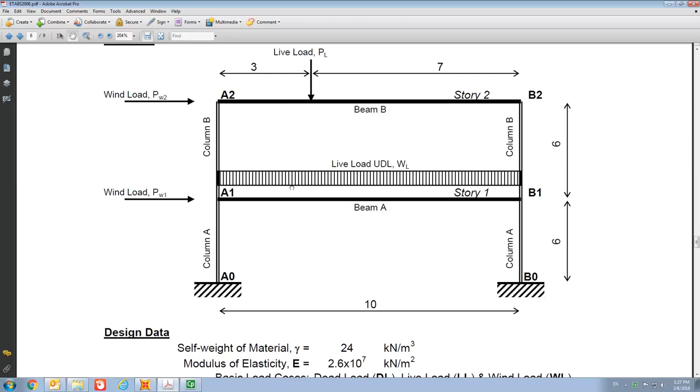So it's actually a very simple frame with two stories, okay, and beam A and beam B you can see, and then you have four columns, or two columns on each side. The distance between the columns is 10 meters, and the height of each floor is 6 meters, right? And this piece of paper is actually already uploaded to Canvas.

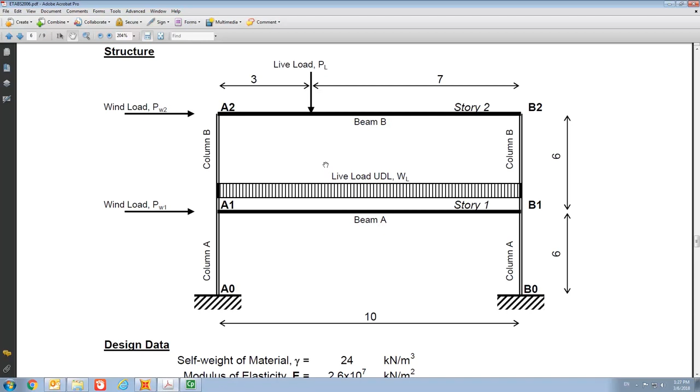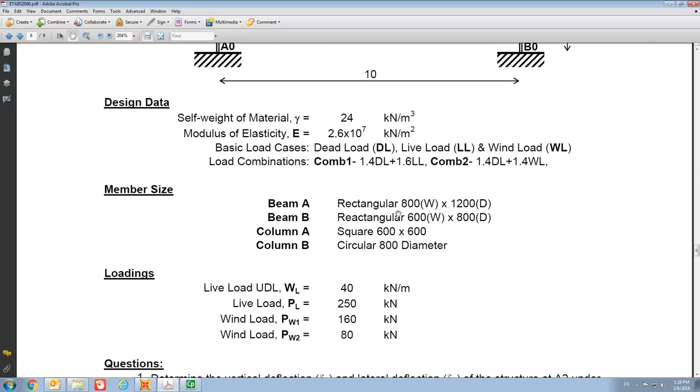And then all the material parameters, including the self-weight of material, that's the density, and also the Young's modulus, are given. The beam and column sizes are also given on the sheet, and then the live load and the wind load are also given there. And if you look at the frame, the live load actually consists of a point load acting on the second floor beam and a UDL on the first floor beam.

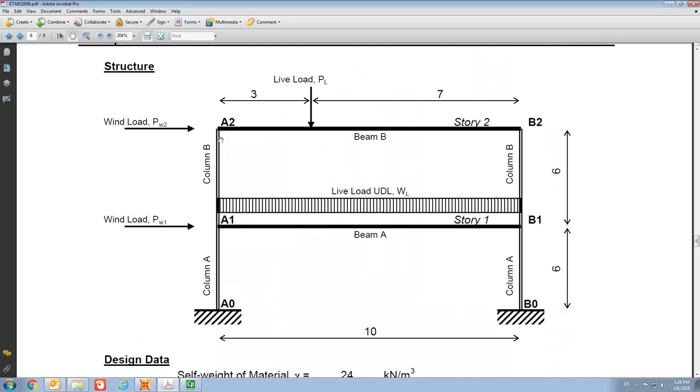And in the wind load, there are 2 point loads, one acting at point A1 here, and then another one at point A2 here. Okay, and then make sure you download and print this out when you are reading or watching this video.

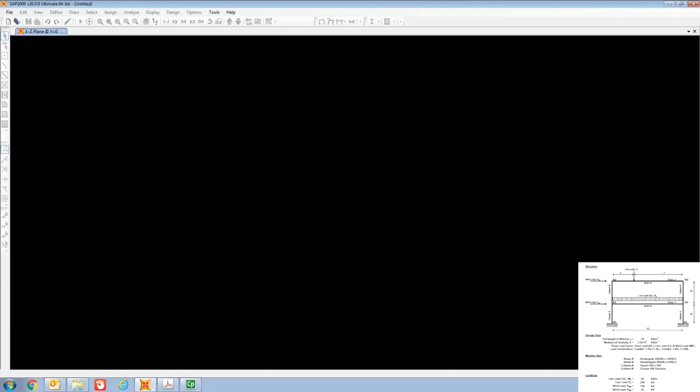So let's now open up SAP2000. So the first thing that you should pay attention to is the unit at the bottom right corner. So make sure that you select kilonewton and meter. That's the unit we're working with. And then we try to build a new model. So on the top, find the File button and then New Model.

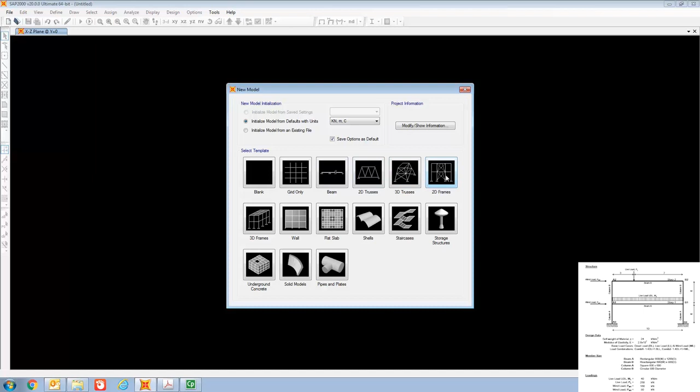So once you click new model, you can find this box in front of you, and on the first line we have a few buttons, and then on the right you can see this 2D frame. That's what we're trying to use. So when you click on it, there are a few numbers that you need to input. First of all, it's the number of stories, so 2 is correct.

Number of bays, so a bay means, if you look at this diagram here, if you got 3 column lines, that means you got 2 bays. So 1 bay is defined as the space between 2 columns. Okay, so here we only have 1 bay, and then the story height is 6 meters as given on the sheet, and then the bay width, that means the distance between the 2 columns, is 10 meters.

And then once you finish these numbers, try to check the grid lines. So the program will create a grid line system. So we try to edit the grid or check the grid lines. So X grid means the horizontal direction. So in the horizontal direction, there are 2 grid lines, right? One for each column. For the left column, grid line A is at -5 meters. At B grid line, that's 5 meters.

So total, that's 10 meters, right? The distance between A and B. But I prefer to change A to 0, to start from 0, and then B is at 10 meters, right? And then Z is talking about the vertical direction. So the first grid line is at the ground floor at 0, that's fine. Z2, that's the first floor, it's 6 meters from the ground floor, that's okay. Z3 is 12 meters from the ground floor, that's also okay.

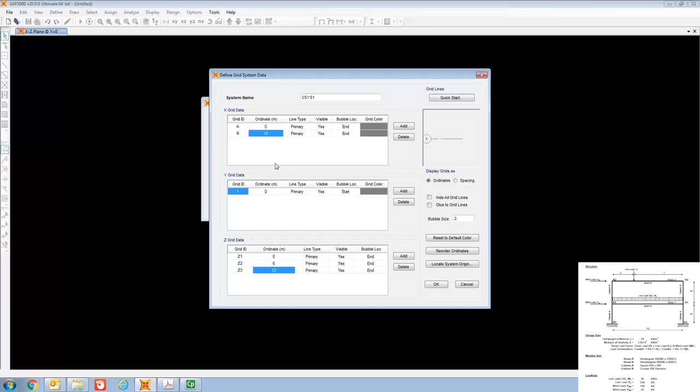So once you check these numbers are okay, you click OK. Right, so this is done. So in front of you there are 2 windows, and usually I would try to work with the XZ plane. So I click the left window, and on the top, this XZ button, I click this. Okay, so now you have 2 exactly the same windows.

Now what we're going to define is, first of all, the material. So you first define the materials. So there are two material names. So we try to modify the first one.

So instead of using this funny number, I try to change this name to, let's say we're going to use grade 40 concrete. So I just say the name is grade 40. And then the material type, of course, is concrete. This is a concrete frame. The density of material as given on the sheet is 24.

And then the Young's modulus, that's the modulus of elasticity, it's 2.6 times 10 to the power 7. So I will change this to 2.6, so 26 with 1, 2, 3, 4, 5, 6 zeros. Okay. So once this is done, it's done, right? The other numbers are not important to us. Right, so this is done.

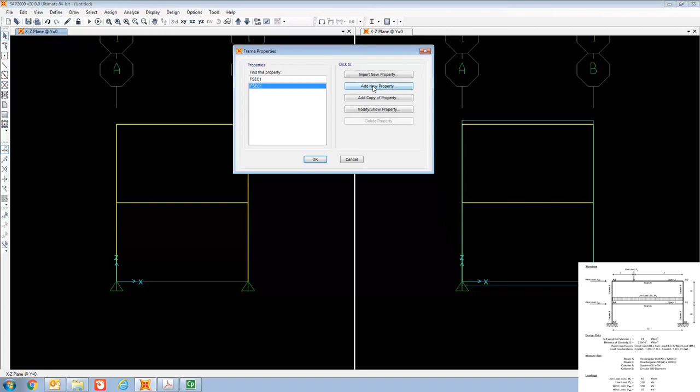And then the second thing is to define the cross section. So you go to section properties, define section properties, frame sections. So frame refers to beam or column. So we try to add new property. So try to choose concrete rectangular cross section. So the first one we're going to define is the beam A, the first floor beam.

And as given on the sheet, the width is 800 millimeters, so this is 0.8 meters. And the depth is 1.2 meters. Okay, make sure that the material is grade 40. And then if you click the concrete reinforcement, try to check this button because they will be designed as a beam in part 2. So click beam. Okay, so when this is done, beam A cross section is done.

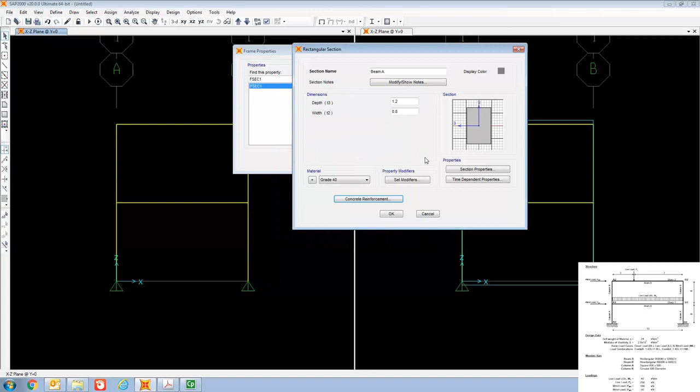Now add another one for beam B. So beam B, that's for the second floor. The width is as given 0.6 meters wide and then 0.8 meters deep. Right, again check the material and check the concrete reinforcement, which we are going to design as a beam in part 2 of the video. Okay, so that's done.

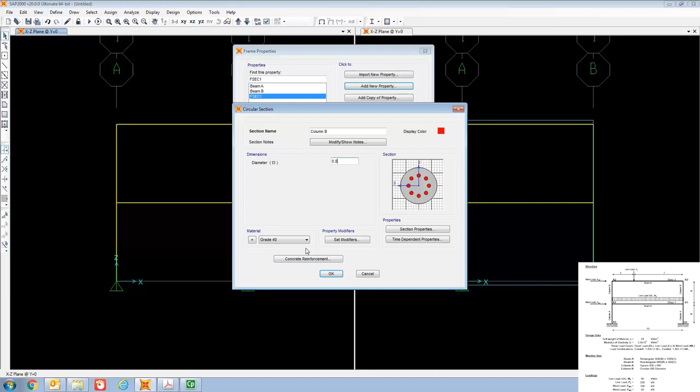Now add new property for circular cross section for the second floor column. So this is column B, right? And then the cross section is 0.8 meters. And check the material, check the concrete reinforcement, which we're going to design as a column, so that's fine.

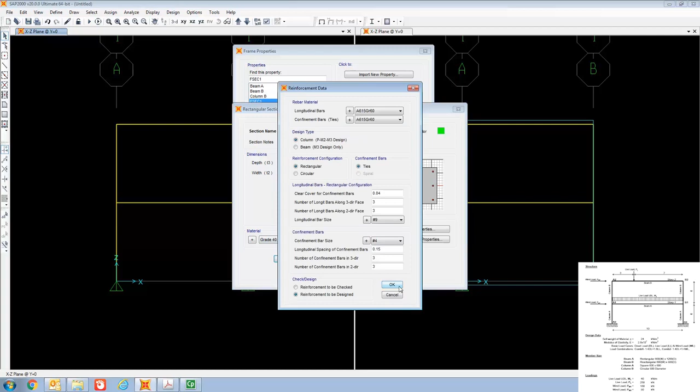And then finally you have the first floor, rectangle actually, column A. Column A, it's actually a square, so it's 0.6 and 0.6 for both the width and depth. And check the material, check the reinforcement, column. Alright, done. Okay, so you now have beam A, B, and column A and B.

Right, so then the next step would be you need to assign which one is beam A, which one is beam B, which one is column A and column B. So this is actually your beam B. So first of all, you move your cursor to that beam, and then you right click your mouse, and then you can see the section property here. Move your cursor here, double click your mouse, and then select beam B. Okay, so done.

And then the first floor beam, right click your mouse, and then section property, double click. This is your beam A. Okay, so select beam A. So done.

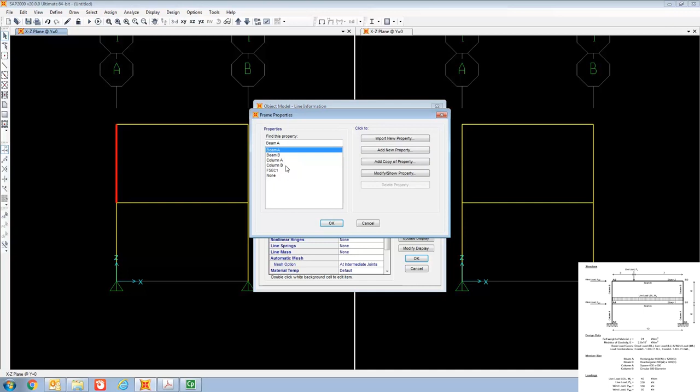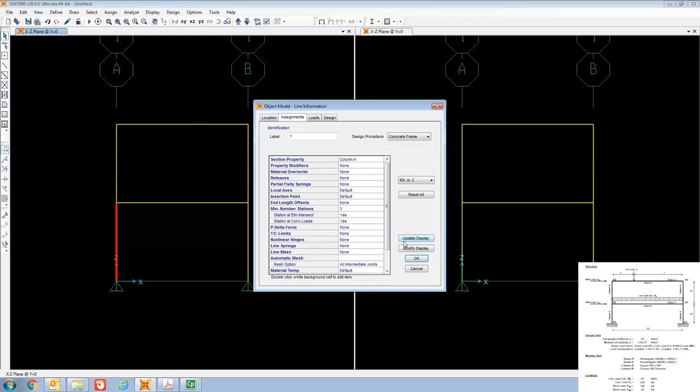Now what about the columns? So this one is column B. Do the same thing, right click your mouse. This is column B. Right, so just repeating, column B. For the first floor, both sides, column A. So this is column A. This one, the last one, the column on the right side, first floor, right click your mouse, double click. This is your column A. Okay.

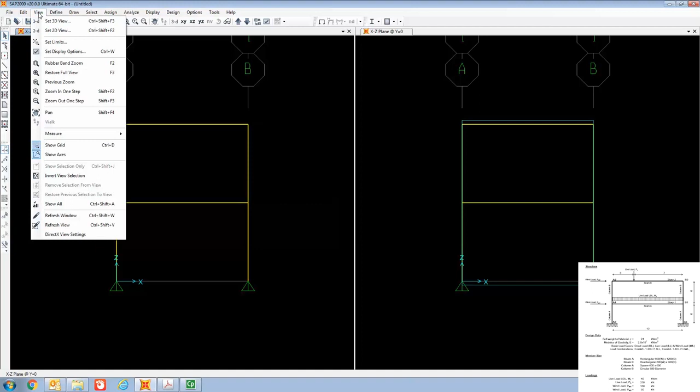Now you can actually try to check whether you have input things correctly. So you go to View, Set Display Options, and then click the General Options button. So the view type, instead of standard, we try to use the extrude. Okay, and then try to view the objects and don't show the reference line, and see what you get.

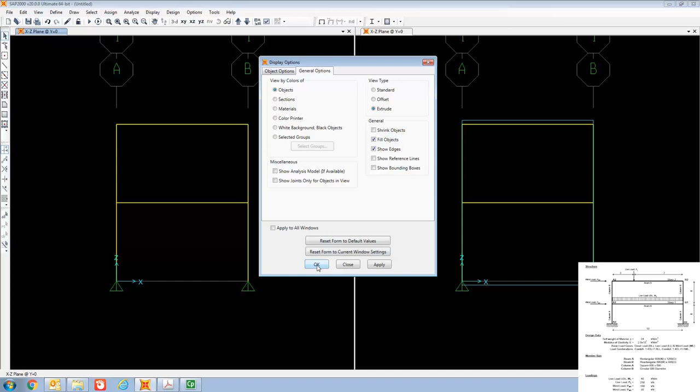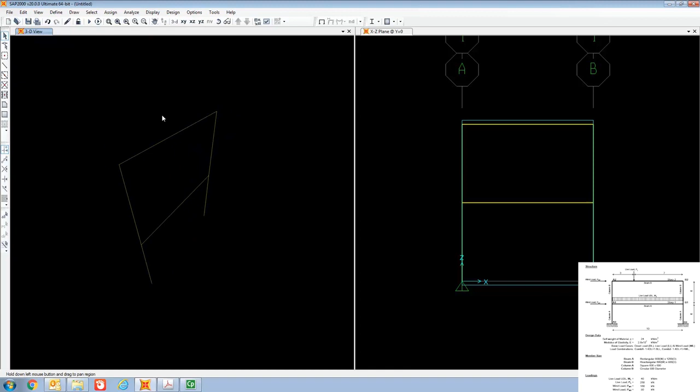Right, so in front of you, you can actually change it to 3D view. So on the top you can see this button here, click 3D, and you can use this button to rotate it. The reason why we change it to 3D view is you can actually see the rectangular cross section for both beams. Okay, and then for the top two columns, you can see they are circular cross section.

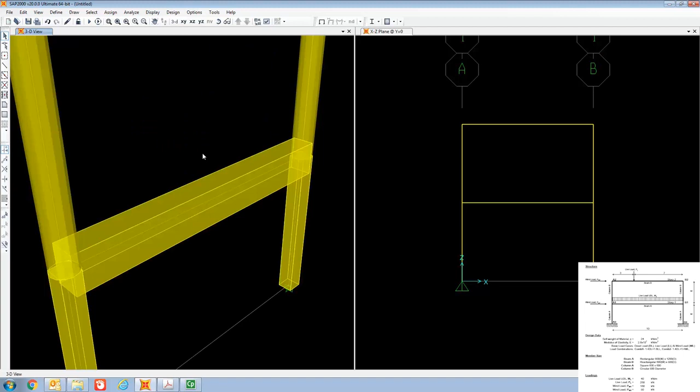What about the bottom two columns? If you zoom in, you can see that they are actually square. Let me just rotate to a better view. Right, you can see that the two bottom columns are square cross section.

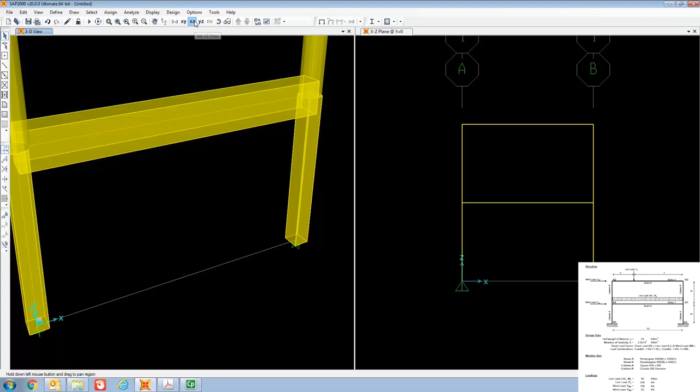Right, and then the top two columns are circular. So that's how you can actually check whether the data that you have input are correct or not. Now I'm going to change it back to XZ plane. Now I'm trying to use the window on the right to input the remaining things.

So the next thing that we're going to change is the bottom two supports. Actually on the paper it's given as fixed, so I'm going to select these two. Just move your cursor there and then click your mouse. Once you select these 2 points, go to Assign, Joint, Restraints. That means the supports. So change it to this Fixed Support button. Click this. OK. So now you can see these two symbols represent fixed supports.

Now the next step is to define the load cases, or first of all, they call it load patterns. So there are three load patterns: the dead load, the live load, and the wind load. The dead load is already there. The next one is the live load, so give the live load a name, I just call it LL. The type is live, and then you click this Add New Load Pattern. Then the next one is a wind load, so I just call it WL. The type is wind. Add New Load Pattern. So now you have the three load patterns: dead, live, and wind.

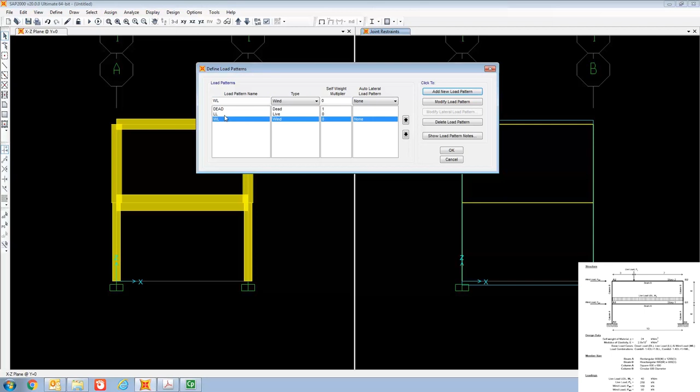Now if you go to the load cases, you can see the dead, live, and wind. And the second one, modal, is something that we don't need, so we can actually delete this load case. On the right you just hit delete. Okay, so you have three load cases remaining.

And then the last thing about loading is to define the combinations. So if you go to load combinations, there are two combinations that we need to add. So add new combo, combination 1. Combination 1 is the dead load plus the live load with a scale factor or load factor. The dead load factor is 1.4, and then plus live load 1.6. So change this number to 1.6 and then press add. So now combination 1 is 1.4 dead plus 1.6 live.

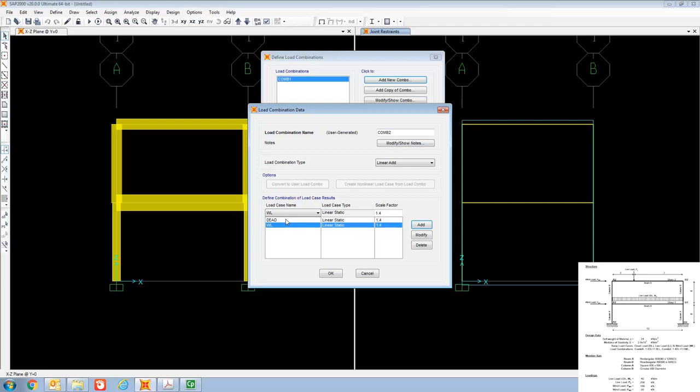Then you add another one, combo 2, do the same thing, dead load 1.4, and then 1.4 dead load has to add to 1.4 times the wind load. So combination 2 is 1.4 dead plus 1.4 wind. Okay, so you got two load combinations.

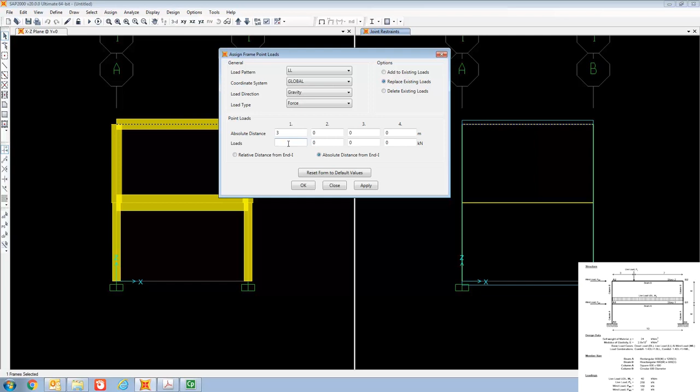So the final thing before we analyze is to define the loading. On the second floor, you select the second floor beam. You go to assign, frame load. It's a point load, so select this one, and then it belongs to live load. It's gravity going down, and the absolute distance from End-I, that means from the left end, is 3 meters. So you just type 3, and the magnitude of the loading is 250 as given.

Now first floor, select the first floor beam, go to assign, frame load. This time it's a distributed load. It's live, it's a UDL. So go to the box on the right, uniform load. The magnitude of the uniform load is given as 40 kilonewton per meter. Okay, so it's done.

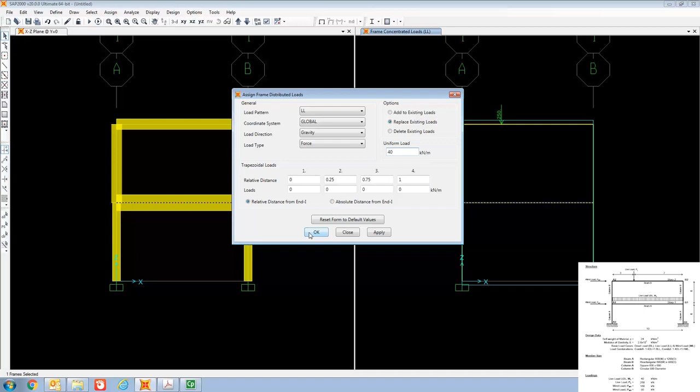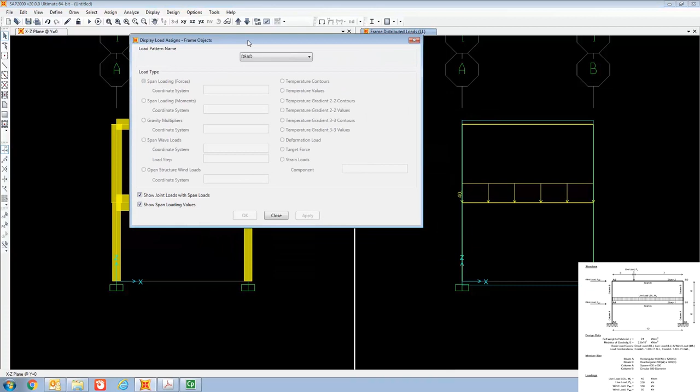If you want to display both live loads on the first and second floor, you can go to display, show object load frame, and click live. So you can see your live load. This is your live load case.

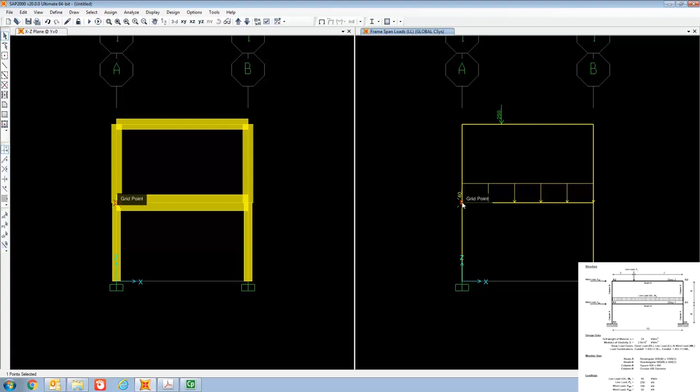Now we continue with the wind. The first wind load is applied at this joint here. So select this joint, go to assign, joint load, forces. It's wind, so select wind. It's in the horizontal direction, global X, that's X direction. And the magnitude is 160.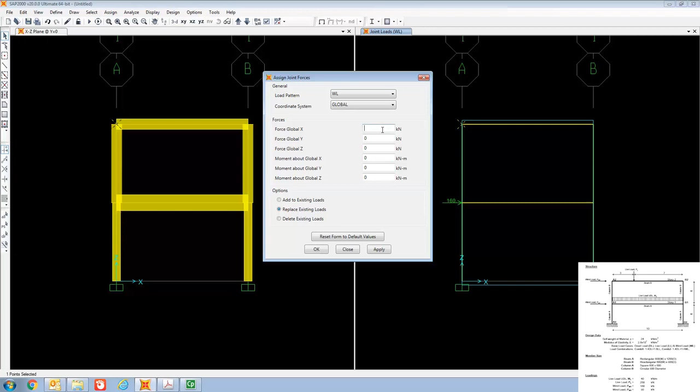Done. Go to this top left corner, select it, assign, joint load, forces, in global X direction, but this time the loading is a bit smaller. It's only 80 kilonewton. Done. Now everything is done.

You may ask, what about the dead load? The dead load, that means the self-weight of the material, self-weight of the frame. Basically, the program will calculate automatically for you, so you don't need to actually input the self-weight. So it's done. We're now ready to analyze.

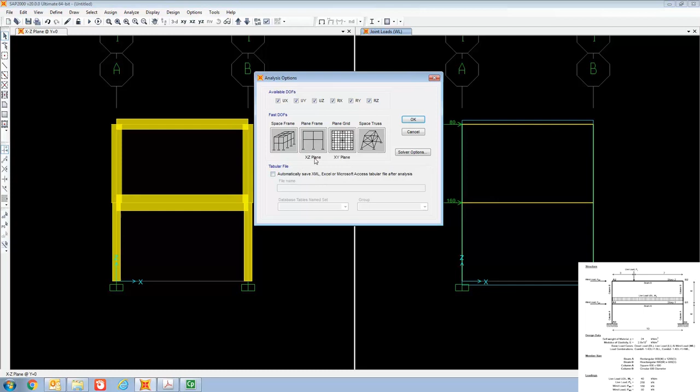So go to Analyze, set the analysis options. So this is a frame lying on the XZ plane. So select this button here. Click OK. Go to Analyze again. Set load cases to run. 3 load cases. Okay. So you just click Run now.

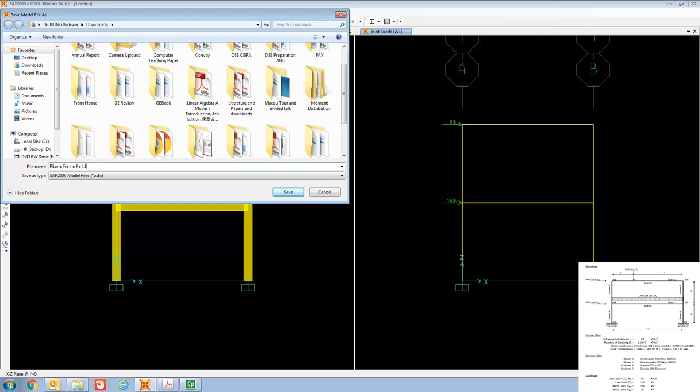So you need to save everything in one of the folders that you want. So I'm going to save it in a whatever. So give your problem or frame a name. So let's say this is called plane frame part 1. Right, so it's done, finished. So it only takes a few seconds.

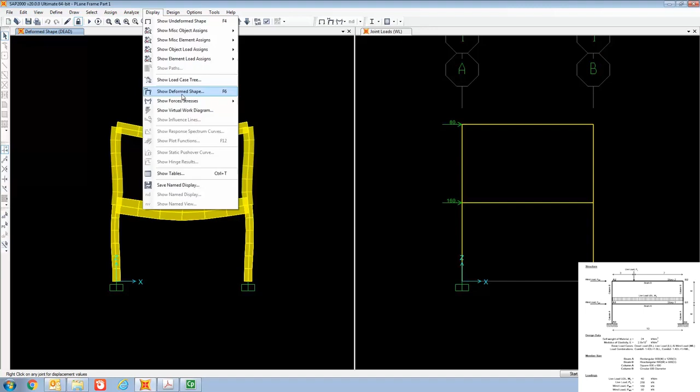And then what you are seeing on the left side is the deformed shape or deflected shape under the dead load. You can actually see the deflected shape for other load cases. Go to Display, Show Deformed Shape. So if you want to look at how the frame deflected under combination 1, let's say, right, that's how it looks like.

And then you can do some funny things. You can do the animation of it. So on the bottom right, you can see the start animation button. You just push it. Right, so you can see the animation of how the beam, or how the frame actually deflects under the loading. And then you try to display the bending moment and shear force diagram.

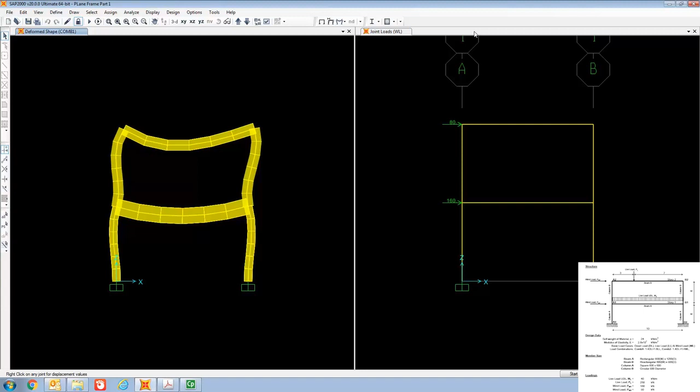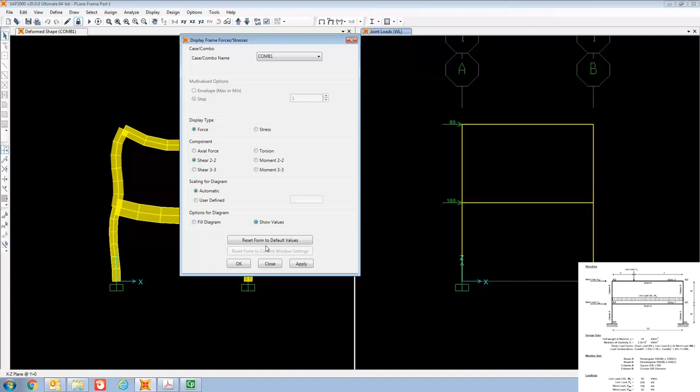So I'm going to use the right window. So I click the right window and then I go to Display, Show Forces, Frames. So it depends on which load case you want to look at. Let's say I'm going to look at combination 1, shear force, shear 2, and then I want to show the values on the diagram. Click OK. Right, that's how the shear force diagrams look like.

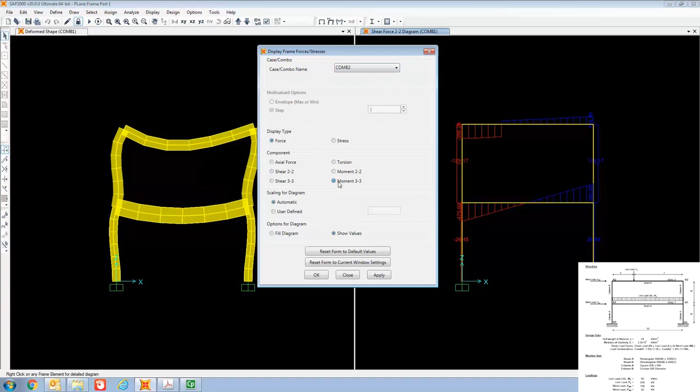So if you want to look at the bending moment diagram, you do the same thing. Let's say this time is combination 2. We're trying to display the bending moment, so Show Forces. So combination 2, moment 3, show values. Right, that's how the bending moment diagram looks like. Okay, with values.

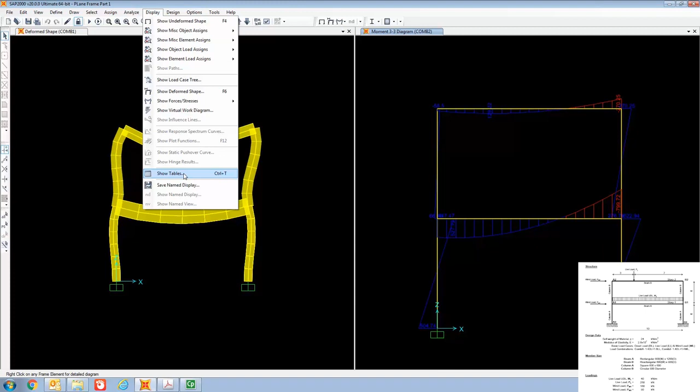And the final thing before we end this part 1 is I want to show you how to display everything in table form. So go to Display, Show Tables. So what we need is the displacement or deflections, the reaction forces. In the frame output, we want to get the element forces. So select these few options, and then on the right side, make sure that you select the load cases that you want. So I'm going to just output combination 1 and 2. Okay.

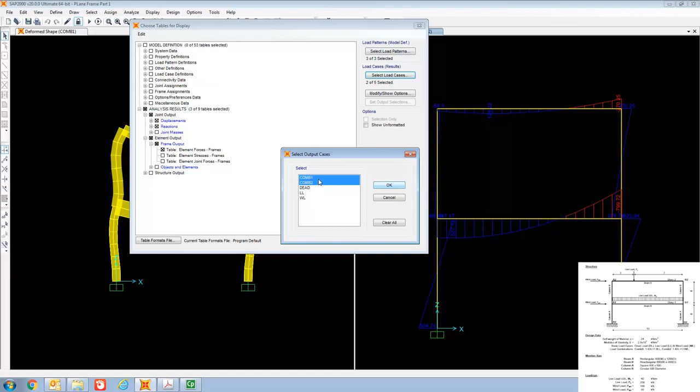Right, so in front of you it's a table form. So this is the element forces you can see on the right side. And you can also select joint displacement, how the frame actually deflects. U1 is the X direction, U3 is the Z direction, R2 represents the rotation of the joint.

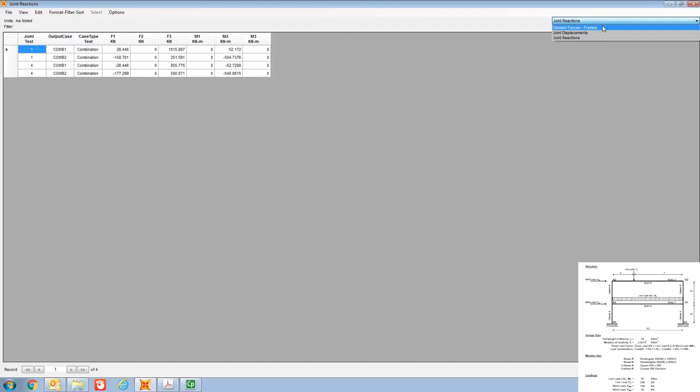You can also look at the reaction forces at joint 1 and 4, the two bottom fixed supports. F1 is the X reaction force, F3 is the vertical reaction force, M2 is the moment. And then the element forces, P is the axial force, V2 is shear, M3 is moment.

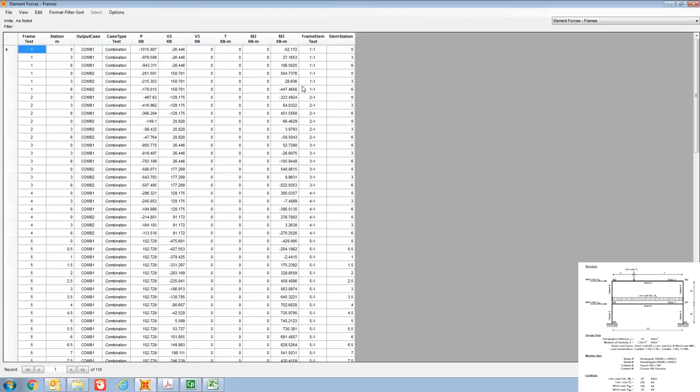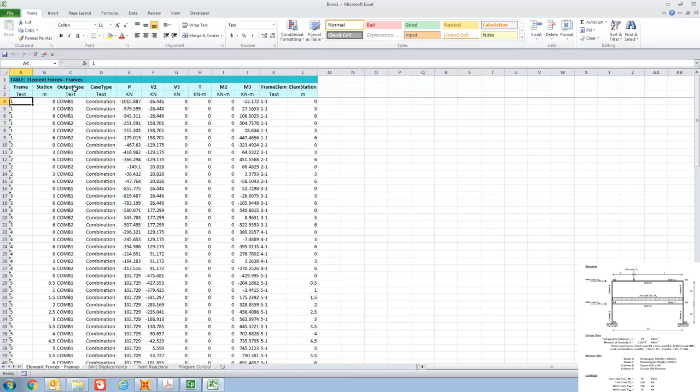And you can export everything to Excel, right? Because once you export everything to Excel, you can work on Excel and input additional formulas, right? So this is how we export everything to Excel. This is the force and moment, displacement, and reactions.

Okay, so that ends my first part of this video. In the second part, we will look at how to design the frame using the same software.